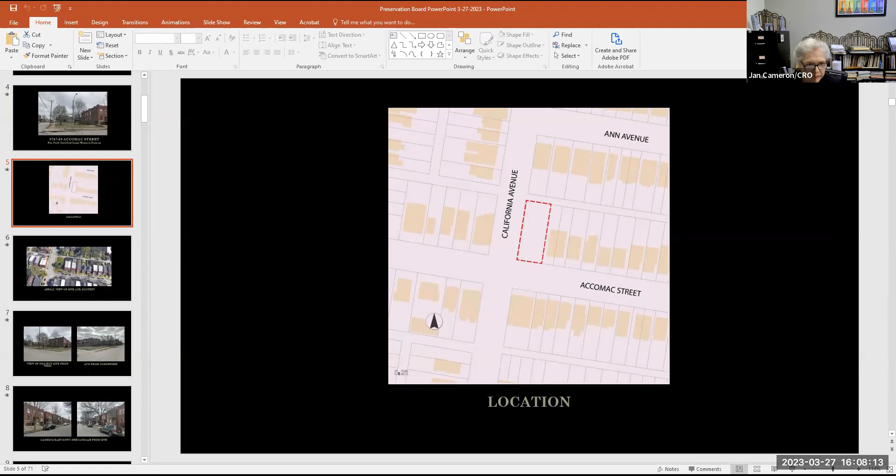It's at the corner of Accomac and California Avenue. There are a couple of things missing from the submission, but we are proposing to recommend anyway that the board grant preliminary approval with the usual conditions. This is, as I said, a two-story house. Could we go to the next one, Meg?

And you see the context of the block, and that's the corner there. I could have done a better job outlining it, I guess, but the corner property towards the center of the screen is the site. You can see that the architecture is very consistent in scale and materials, and the proposed building will comply with that. Next.

Another shot of the lot. So it has a substantial exposure from three directions. Next.

And this is the context directly to the east of the site. As you can see, again, it's extremely consistent in rhythm, materials, and scale. Next. This is looking to the south of the site. It's actually at the left-hand side at the intersection. And next.

And now we're standing on Accomac, looking towards the site to the west. Next.

Okay, so now this is the site plan. We do not have any plans for the proposed garage or carport at the alley. But you can see that it conforms to the setback of the block as it should. Next.

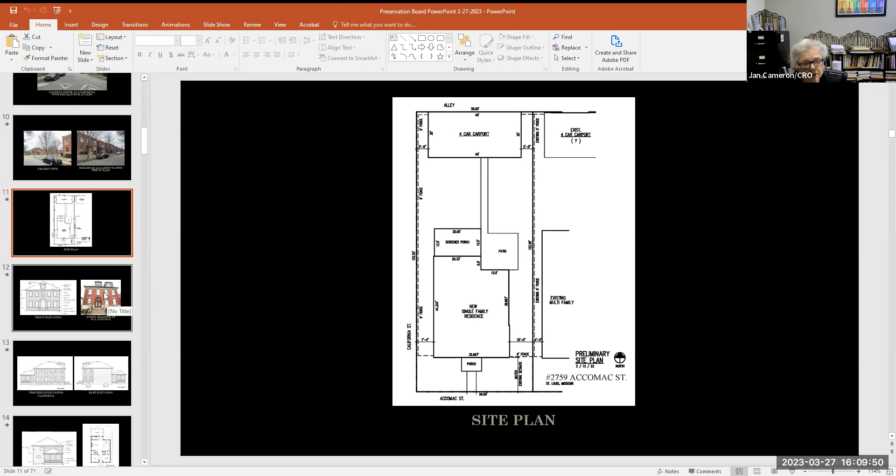The submitted model example is at 2812 Accomac. It's taken its inspiration from it. It is not an exact copy, which the standards do not require. But the materials and most of the detailing is correct. It's a little bit simplified. Next.

On the left is the west elevation, and this is the California street facade. You can see that substantial amount of fenestration according to the standards. The opposite side, the east elevation, will be up against the neighboring property. So they have returned the brick the same distance as the distance between the buildings as the standards require.

A couple of concerns, or well, things that need attention on the California elevation: the stone does not appear to run down to grade at the foundation, and we haven't any specific details yet for the proposed porch at the rear. Next.

And this is the rear elevation where the porch is a little bit more prominent, and this will be visible from the street. Next.

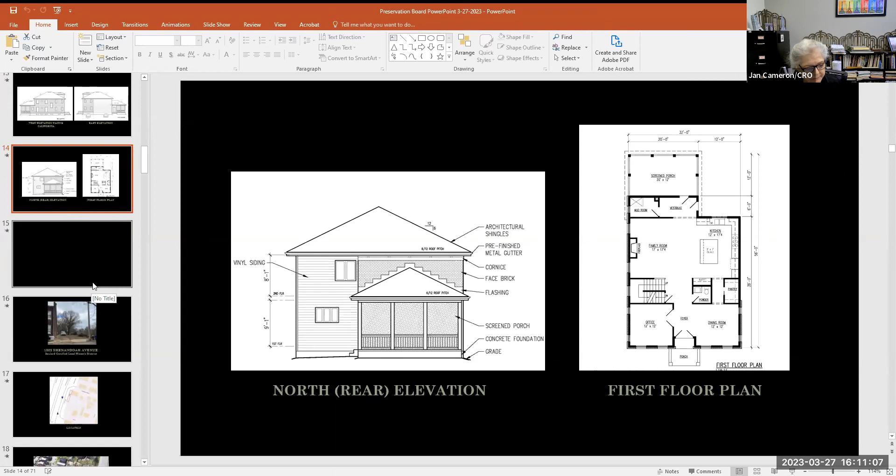Okay, so staff is recommending the preliminary review be granted, subject to the Cultural Resources Office reviewing and approving final plans, exterior details, material selections, and the plans for the proposed carport or garage.

Questions? Commissioners, do you have questions for Jan? I do. Jan, are you going to keep an eye on this stone base?

It's so often these stone bases don't really look anything like the stone bases that the model examples are. Can you go to the next elevation, where it sort of floats above a lot of concrete in the windows? That would not be something we could approve.

But again, this is a very preliminary submission, so we do not have material samples now. They may be having those at the meeting tonight. I'm not certain. But also just the design of this thing, where the stone floats above the windows, it's just sort of awkward.

Is that the kind of thing you would catch at staff level? Absolutely. Okay, thank you. Further questions of Jan?

Okay, let's have the applicants, and we'll have questions for them. Ms. Ball? There you go. Okay, you're here.

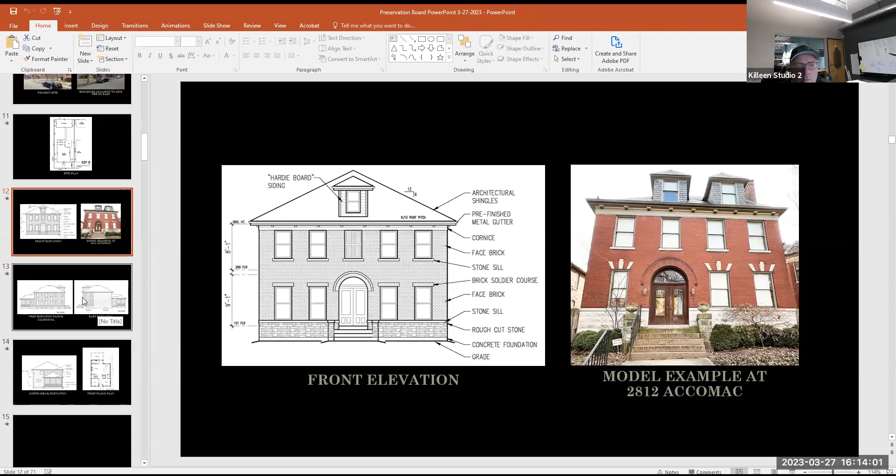Thank you. Further questions from commissioners of the applicant? Just so you guys do know, our architect is on the call, John Elbers, and then our contractor is on the call as well, Tim Dolan. So if you have specifics that I might not be able to answer.

Okay, commissioners, questions for the applicant's architect, or for the applicant's contractor? Anybody? Mr. Albers, you're following me on that, I assume, right? Yes, I am. Thank you, nice work. Okay, Michael, did you have a question?

Just a general question to the team: are you comfortable to work out details and abide by the staff decisions on this plan? Yes, absolutely. Wonderful, thank you. Jan, has anybody signed up to testify?

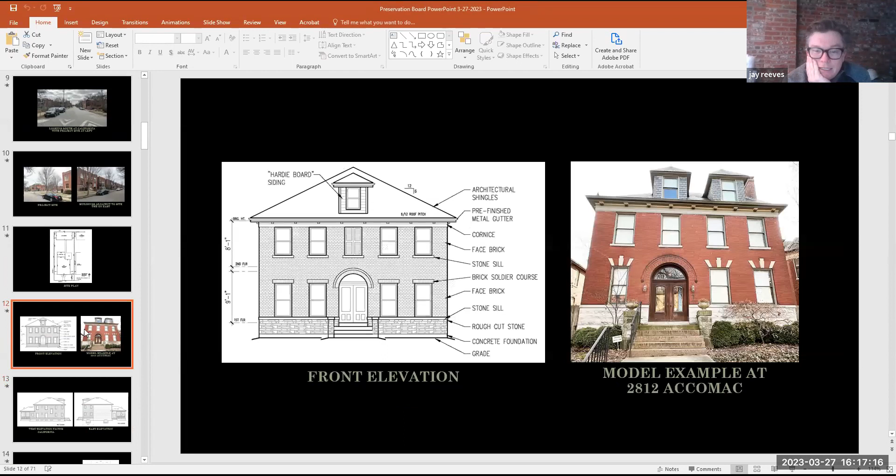Number two, the mass and proportion of the Accomac elevation, the California elevation, and the north elevations are not comparable to the mass of the adjacent buildings or the common overall building mass within the block of the model example. On that topic we have a few comments.

One is there appear to be no two-story houses on that block as wide as this, 33 feet wide or wider, with a hipped roof and only one dormer on a public facade. The model example is of a similar scale as the proposed, but has two front-facing dormers.

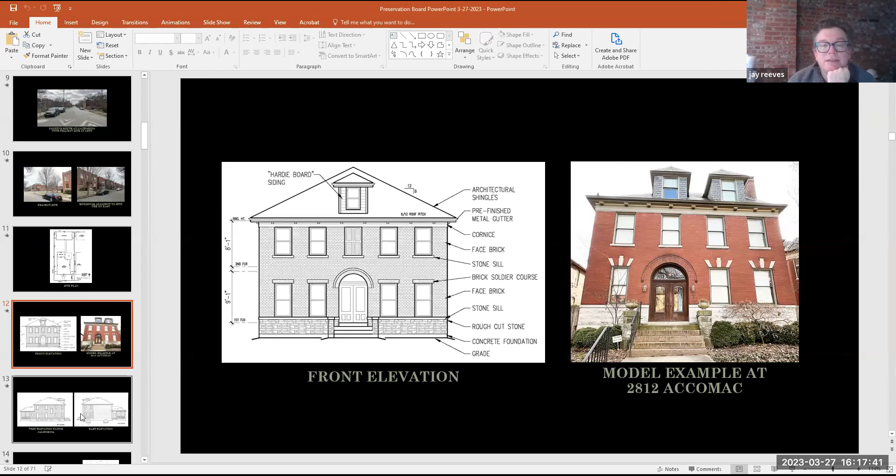The roof lines are all less intricate, particularly as we move to the California side. It's really just a big blank hipped roof. Dormers are more sparse or non-existent.

The first floor projection beyond the plane of the second floor walls on the California elevation, where the north facade stretches under that first floor roof addition, is not seen elsewhere. The first floor roof addition on a public facade is not something we're used to seeing either in the neighboring buildings or in the model example.

And then the screen porch, which is dominant to California, is on the public facade, and that's not seen in the model example or comparable to any adjacent buildings within the block.

Finally on that subject, the model example has dormers and detailed bays projecting beyond the typical wall plane on the side facades, which in the model example are really just facing another building, but that does provide more richness in massing and proportions than we see on this proposal.

But on this proposal, that's facing California, so that California and north elevations are pretty dominant, but there's really no detail there.

Item three was the ratio of solid to void. There was a report mentioned, but it's not been met on the California facade per the district standards. CRO states it partly complies with a 23% ratio, but that's less than the 25% minimum. But our position is actually that it's 14%, because that 23% includes the ratio of screen porch openings as part of an opening.

But as we're seeing that as a clad wall of screen, we see that as a solid, and it doesn't seem like that should count towards window openings. So by our math it's 14%, which is well below the 23% or 25% minimum. Similarly, the ratio of solid to void is not met on the north, which is a semi-public facade.

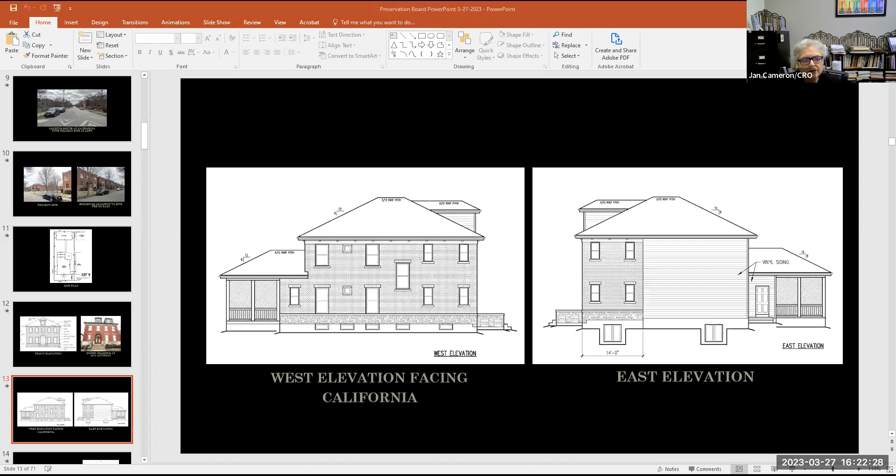Well, I thought that the majority of those issues were minor enough to be handled at the staff level, but if that's a big concern of the neighborhood, then we could certainly work with them and the applicants to come to some kind of appropriate ending, I guess.

Cool, thank you. Let's see. Commissioner Killeen, have you got a motion? Yes, sir. I move that we defer action on this for a minimum of one meeting.

Is there a second? Second. Any discussion? Commissioners, there's a motion on the floor to defer consideration of this for a minimum of one meeting. I'm going to call a roll and see what you think about that. Commissioner Robinson, do you vote yes or no?

Can't hear you, Tony. Thumbs up or thumbs down? Thumbs up is yes, okay. Let's see, where did my lawyer go? Nancy, is a thumbs up okay? He's having audio difficulties. No, I can't hear you either. Why don't we try to come back to him? But yes, I think since you're just deferring, that's probably fine.

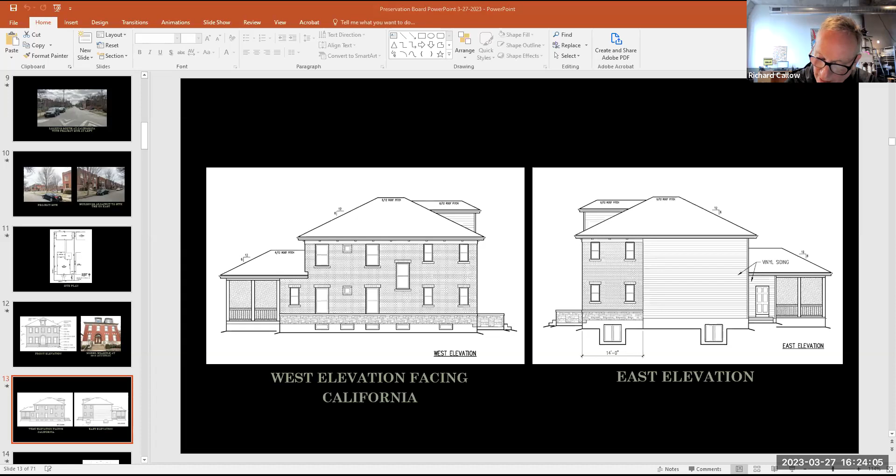Commissioner Hamilton, yes or no? Yes. Commissioner Killeen, yes or no on your motion? Yes. Commissioner Richardson, yes or no? Yes. Commissioner Allen, yes or no? Yes. Commissioner Hammaker, yes or no? Yes. The chair abstains on this vote. Counts 6 yeses, 1 abstention, no nos. The item is deferred for at least one meeting.

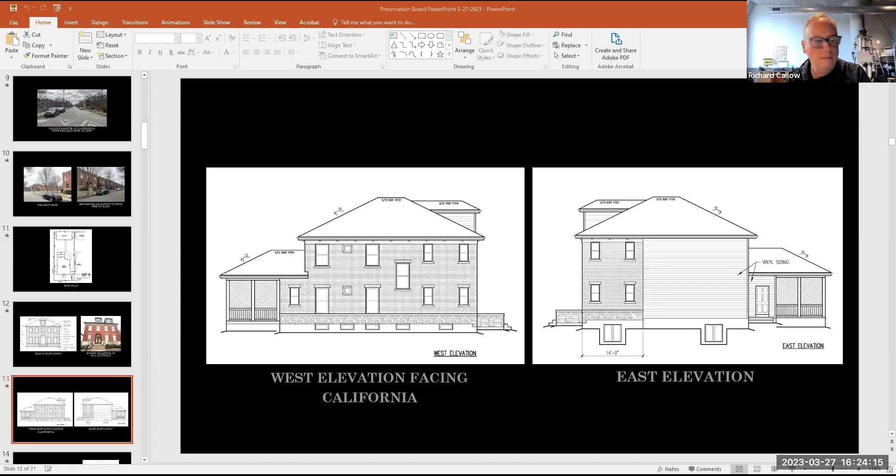Okay, let's do agenda item B. Sorry, can I ask just one question before we move on? Yes ma'am. So what are our next steps? I just want to make sure that we have everything that we need, so we can get everything fixed and not get deferred again. I think you can expect a phone call either today or tomorrow from the Cultural Resources staff. I would personally not be inclined to defer this another time, so I hope this can get worked out between the two meetings. Can I say something? No.

Let's do agenda item B, 1332 Shenandoah. Okay, this is another proposed single-family new construction, this time in the Soulard Historic District. It's a very interesting little lot at the corner of, well, actually really at the end of Shenandoah Avenue. Could we go to the next one, please?

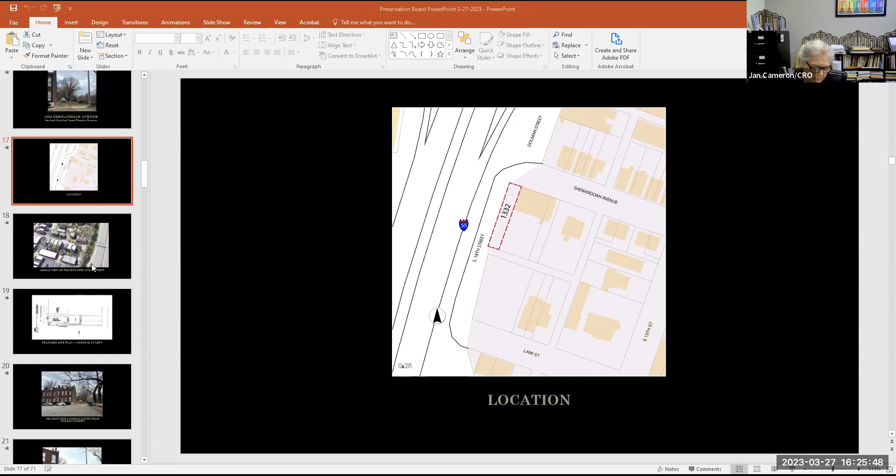It's right up against the highway. And there used to be 18th Street there, but it's no longer there. It's all the right of way of the highway.

There will be very little possibility of anyone seeing the western facade, which is up against the right of way of the highway. So the brick ends at that corner, and we feel that that's a reasonable compromise. You can see that it's going to, well, let's get to the next one, please.

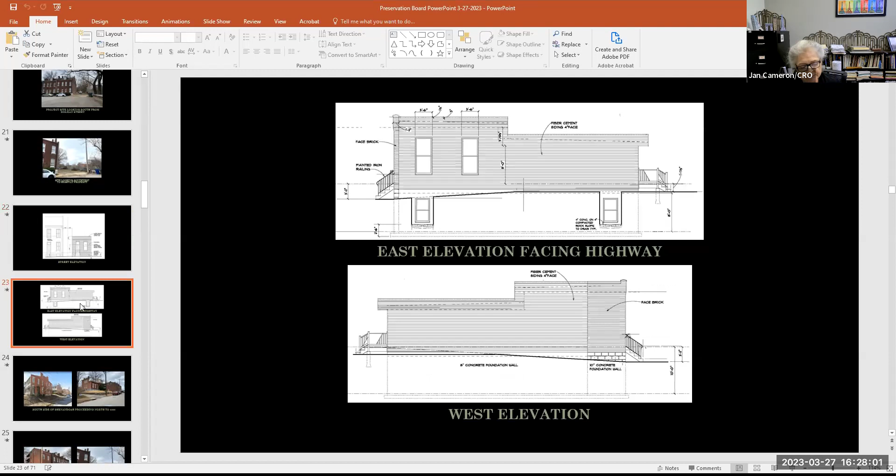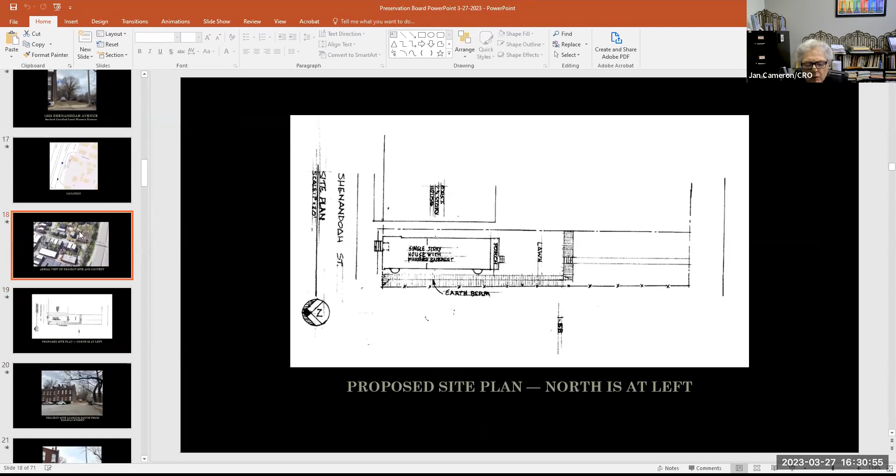Well, it doesn't, but I think that the extraordinary character of this site and its location is not going to have much of an impact on the block by having a 1-story here. I mean, there's a whole mix of building types and setbacks on that side of the block. And yeah, and I saw that, honestly. But it's almost like being at a dead end to go up the street. So we thought that a little bit more flexibility was appropriate.

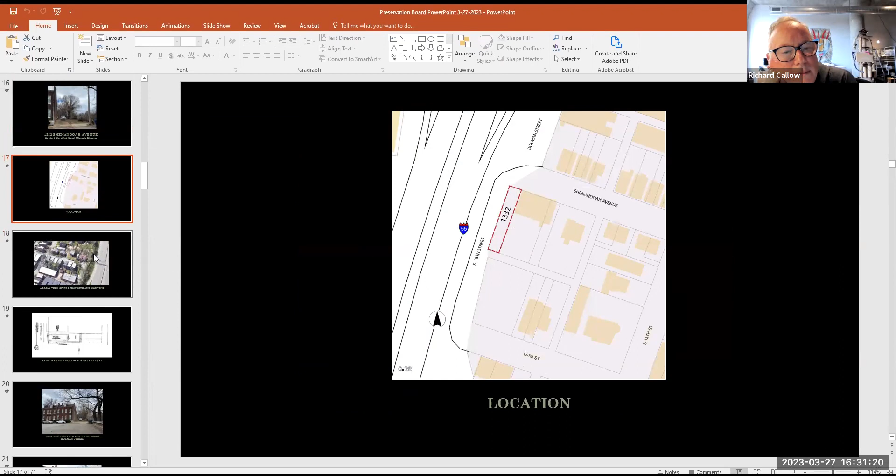Jan, please put your cursor where it's going to go. I don't have a cursor. Who has it? I've got the cursor. Okay, right here.

Okay. And it will align with the buildings adjacent to it. So, what's the width of it?

I'm not exactly sure. Let's see, sorry, because I cut all the dimensions off. It's about 16 feet. Okay, thank you.

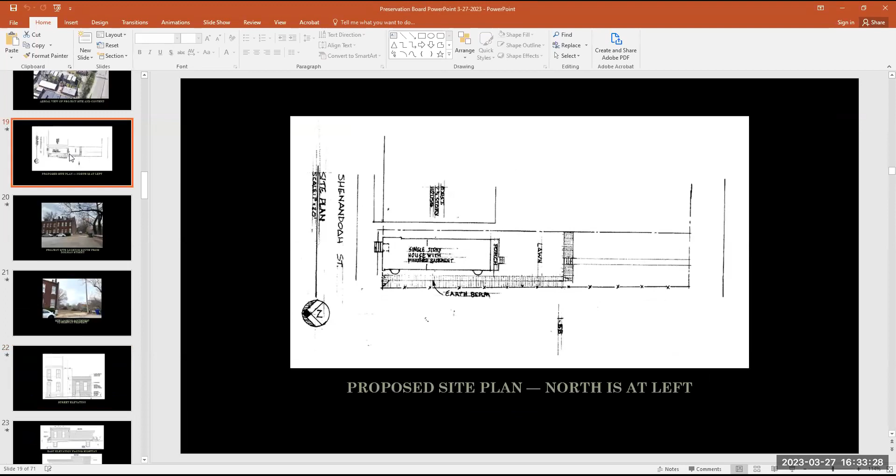The lot is so small, it's only 26 foot wide. The building is 16 foot wide. That'll leave, we would comply with the 4 foot setback on the east side. It only leaves about, I believe, 6 feet on the west side. Couldn't do anything much wider, much larger, and still be in compliance with the setbacks. So, pretty much what we wanted, I guess, is my answer.

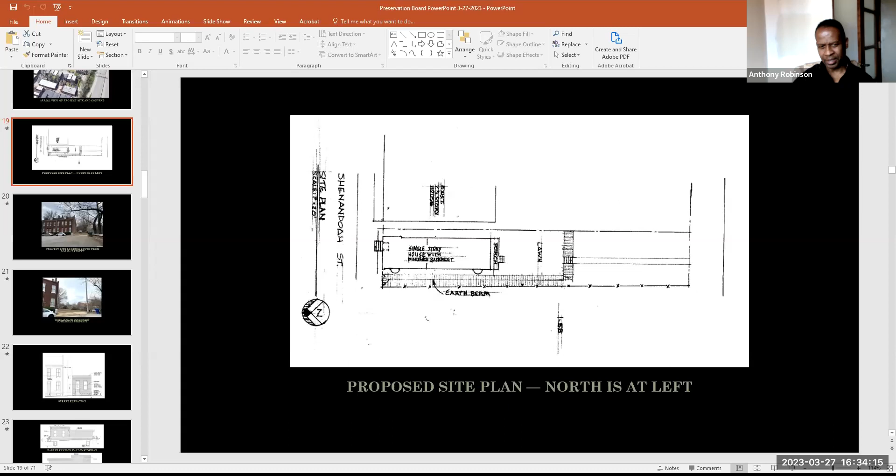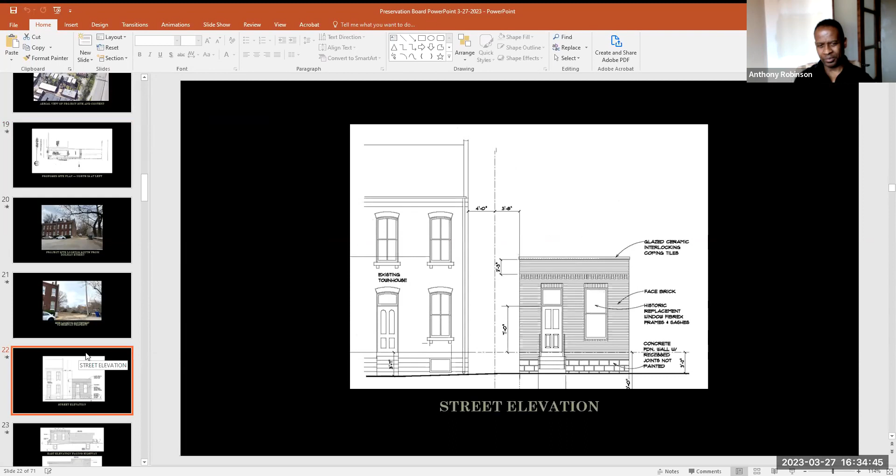Yeah, I'm not sure my question was exactly answered. I understand you have living space in the basement, but one of the historic requirements involves cornice eave lines, and this substantially doesn't comply. My other concern is you've got a 26 foot wide lot and a 16 foot wide building, which means in my mind substantial space to work with. Now when you factor in the setbacks on both sides would be 4 foot. It's my understanding the setback would actually be 3 feet, and that would allow you a 20 foot wide building.

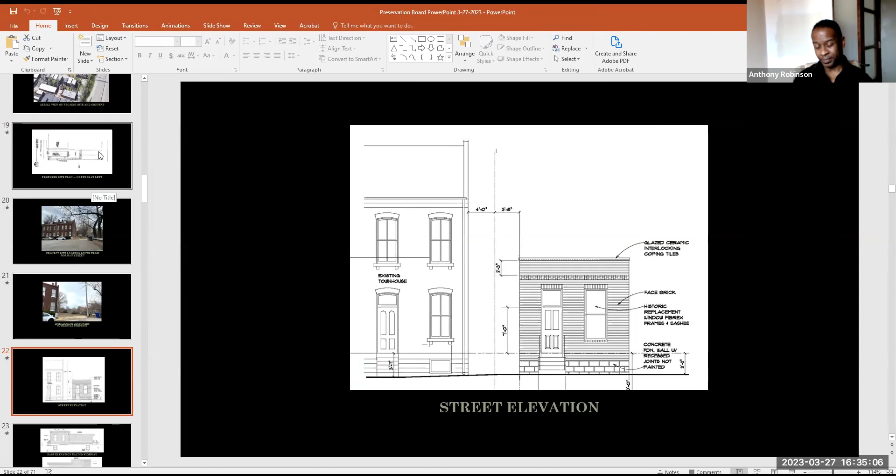In my preliminary inquiries with zoning, I was told 4 feet. That's what I was going by. It is 4 feet under normal circumstances, but in a narrow lot, it's 3 feet. That is the main building. Yeah, and this would be, in fact, the main building. Yeah, okay.

Further questions? Commissioner Allen? Just a question about the front door, since this came up with a letter sent to us in our packet too. It looks like the design has changed to be a 4-panel rather than a single panel with a single light. But if we could clarify, are those upper panels glazed or solid? What's going on here?

Is your question to me or to Cultural Resources? To you - our staff can answer it, but since you're the applicant and this is what you're proposing, maybe you can answer. I wish our architect was on with us, but I don't believe he was talking about them being glazed at all. My concern was I wanted a door to have a transom above it so it fit in, and that's also what drove the entire need for 10-foot ceilings in the front part of the building. But the transom itself would be glazed to let light in, of course.

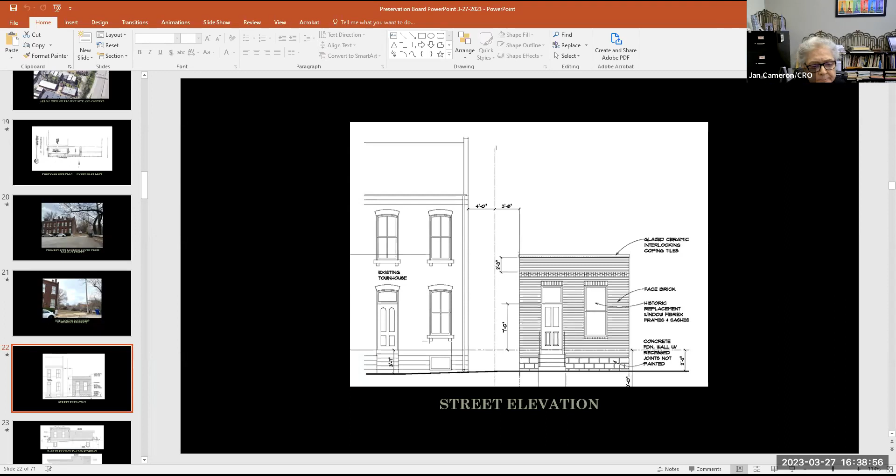Okay, Commissioner Robinson, would you like to make this motion? Sure, I move that the preservation board hold on just a second.

You've gotten the easy part. Now we need a verb. I move that the preservation board deny preliminary approval, as the design does not currently meet the historic district standards.

Second. Discussion. Commissioner Robinson, anything to add to your comments from the questions?

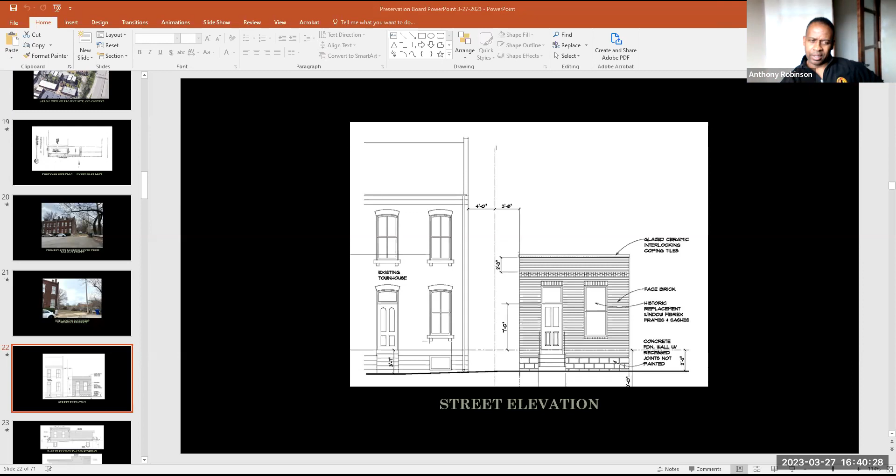Well, while I see that designs on the block are different, setbacks are as well, but looking even on that side of the block, every one of the structures is 2-story, 2.5-story. So I think this sets a really bad precedent. Everything on the other side of the block, while the building line is consistent there, this side it's not, and I get that, but the height, yeah, that's a problem.

And then I also don't think that given the width of the lot, they're doing a disservice to what could be done on the lot. And I understand about getting old, and that makes sense, but the reality is you can design a house where the master is on the first floor to address that and still create a second floor, which I think should have been done.

Further comments? Yeah, I have some comments on this one. I think the staff report said that there is like a 1.5 story on that block face. So I think it ranges from 1.5 stories to 2.5 stories.

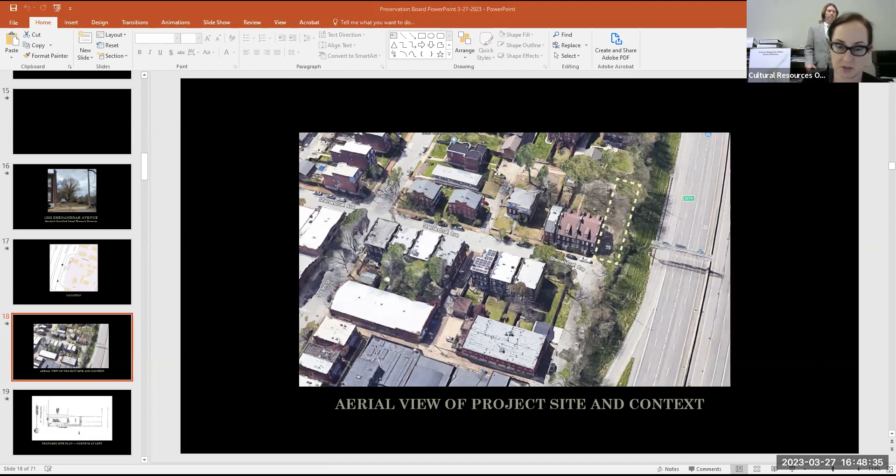Okay, how do you want to handle C and D, Meg? Since they are basically identical projects on adjacent vacant lots, Mr. Bettis will present them as one project, and I will turn the computer over to him.

Hello everyone, how are you this evening? Hey Bob. Are you looking more and more like Keanu Reeves every meeting? Well, we're going for a look, and I cannot pull it off at all, but I'm gonna keep trying. I think it's very successful. Tiffany, what do you think? Don't make her say anything. I'm sitting over here laughing to myself. Listen, I'm pushing 50, if I can still do this, I'm doing it. You are not pushing 50, sir. I sadly am, unfortunately. You're aging well. Whatever makes you feel younger.

You look good. Can we see the PowerPoint? Okay, let me get caught up real quick here on the PowerPoint.

Some background: I think a few of you were not here last month. These two items were deferred so the applicant had time to meet with the neighborhood to discuss the projects. I'll be brief since this was discussed prior, and I did enter in all my items last month. Richard, am I okay since this was deferred? Yes, you are, this is a deferment. Thank you, sir. So the proposal is to construct two new houses at the empty lots you see before you.

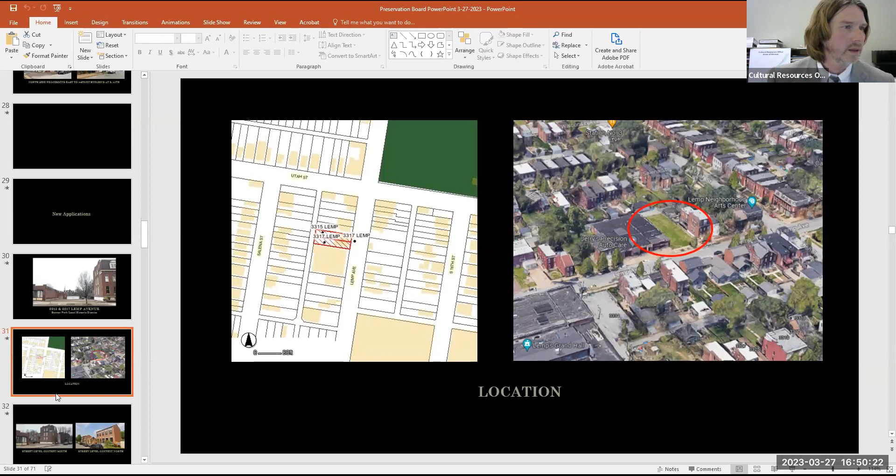This is the proposed location. We're in Benton Park, just south of Utah. Here's some street level context. Across the street you have several new constructions over the past decade or so, and the left-hand side is the context on the block itself. This is looking south on the same street. On the right we have some 1-story commercial along with 2-story. The block itself is a mix of 2.5-story, 2-story, and 1-story buildings. And this is the streetscape for the proposal.

This is the model example for the property, at 3313 Illinois. So this is where I want to stop and give some more background. You may have read this in your staff reports, but I want to reiterate: the board saw this exact same design in 2019 and approved it as submitted.

Staff felt that since this came in the exact same way, at that time we also did recommend approval. We felt that given the site conditions are pretty much identical to the Illinois side, for the most part, we would still recommend approval. We felt it generally met the appearance of the model example. At the last meeting, the neighborhood did bring up a good point which I missed, and I wanted to bring that up really quick.

On the south elevation of the 3317 building, you will see some of the second floor. So we're going to have them run the brick much further back than originally proposed, and that revised elevation is in your packet.

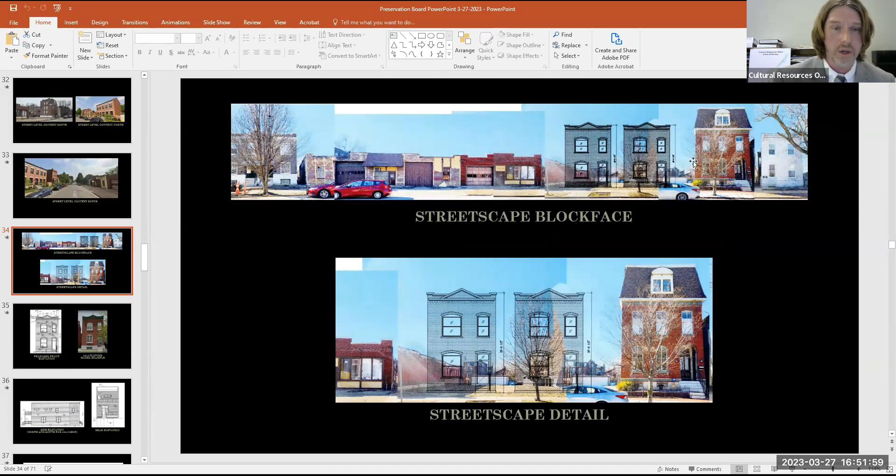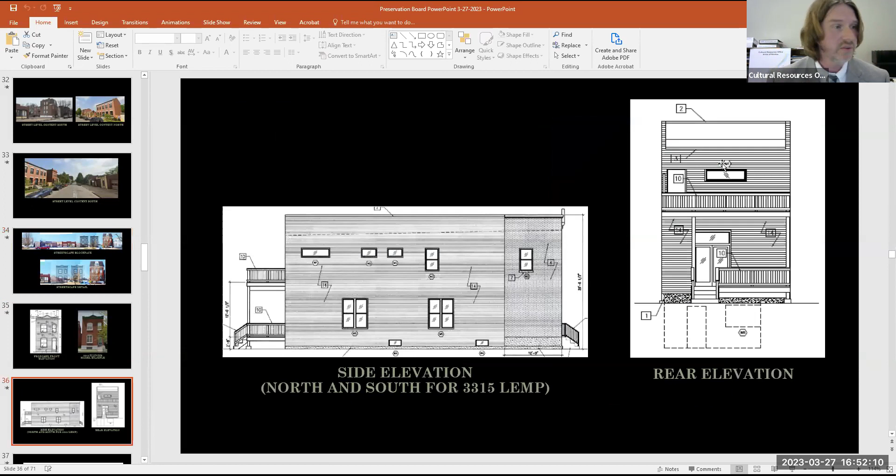This is the rear elevation for both properties - the south elevation and north elevation for 3315, and also the north elevation for the 3317 building. This is now the revised elevation for Lemp. I directed the applicant and architect to reference the brick massing of the property here on the right, having it run back, making a plane break, so you have a logical break where brick would be historically. Then on that rear portion, we can trim it out to make it look more like a frame addition. We felt that was a little more appropriate, and it gives a better line of sight over that 1-story building. That was a change from last month, and the applicant was totally fine with doing that.

So given that, staff did recommend approval, subject to the usual language where we will review final details, drawings, materials, and colors. You did get a packet from us with letters from the Benton Park Neighborhood Group, and Mr. Mulligan is here as well to speak. Any questions for me?

Bob, I see the model example has a window at the basement, nothing in the drawing for that. Right, so when this was approved initially in 2019, it did not have a window there. That was also brought up by the neighborhood group. Since the front facade really has no difference in terms of the sites from the previous one to this proposal, we felt we should recommend it as submitted. The neighborhood group would like to see a window in there. If there were to be a taller foundation for these, perhaps we could see that being a different proposal, but this is what we saw last time exactly. So we felt we had the need to recommend approval as submitted like this.

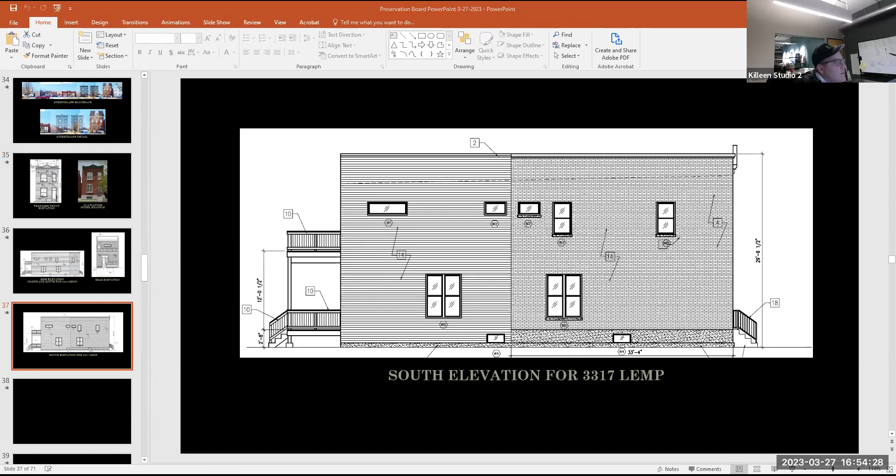Who wants to ask him about the basement window? Oh sure, I'll ask Mr. Askins, would you be up for putting a window in the basement in your front facade? We prefer not to, based on the previous drawings that were approved. The previous house we did not require it, we would prefer not to. We made the adjustment and the financial costs without hesitation with the addition of brick that Bob asked us to do, so we felt like we were definitely trying to work with him on that, and we've done that. We hope that a basement window is not something that, considering it's been approved before, would hold us up. Thank you, further questions of the applicant?

Okay Bob, who did you say was here to speak? We have Tim Mulligan from the Benton Park Neighborhood Association. Hello Tim, speak. Hi, thanks for accommodating time to review this for the neighborhood.

Unfortunately we weren't able to catch up with Mr. Atkins during the month, but we did a review, and the reference building that was built at 3327 Illinois has some, I would refer to them as just unpleasant discrepancies from the model, and they're called out in my letter.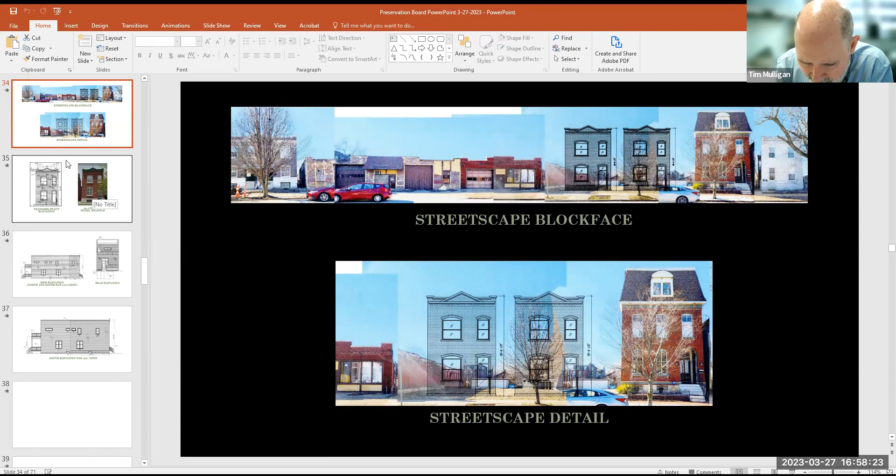And then there's other examples, like the brick windowsill, which seems to be proportionally very mismatched. Generally those are 2 bricks high. The one on 3327 is a little more than 1 brick high, so there's some proportion challenges there. And the polychrome brick is not really a historic detail found throughout the neighborhood, so we request just utilizing the same brick for the detailing.

I think those are the highlights.

Thank you. Mr. Callaway, if I may address— Wait, who's speaking? Orlando Askins. I have not called on you yet, sir.

I have a question. Go ahead. I guess I'm confused procedurally. If this was approved a few years ago with these designs, what occurred to prevent the actual building from complying with those designs? What went wrong at that point?

Bob, do you remember? I'm unaware, I was not here at that time. Are you asking why the building was constructed to not match what was approved at the board? I'm sorry, is that what you're saying? Yeah, that's what I'm wondering. I'm wondering, okay, we could approve the drawings again, but then what would prevent this same thing from occurring where the end result was not what the drawing said?

Sure. It's not for us to speak for other departments and other people in the field who have to do these inspections. Unfortunately, we'll have to ask for some more diligence at the site level. That's all we can really do. Staff does not go out there and watch every step of the build, so we do rely on other departments to make sure that they've followed those plans. That's all I can really say on that, and I don't want to speak for other departments.

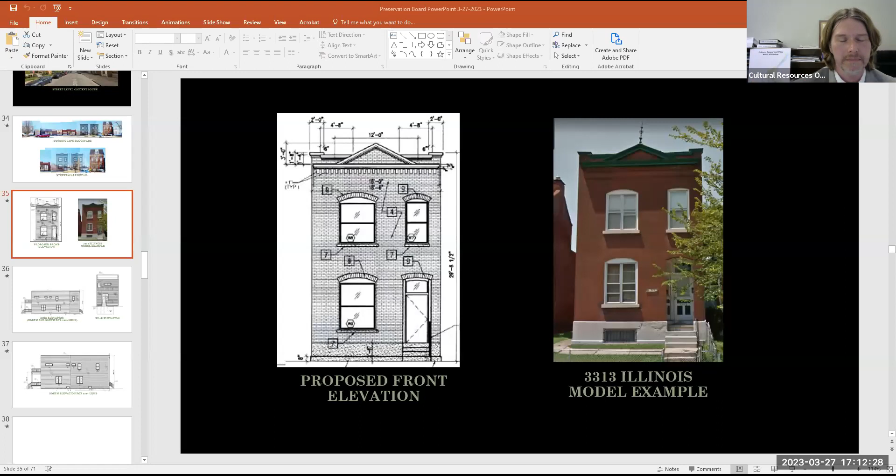So I think the window, from a realtor standpoint, he's making all these adjustments, and something like that is a major addition to a budget. And we have a model example that it says it complies with. So I don't know what the circumstances were behind that. I know most of us were on the board in 2019 in-person meetings. So again, this goes back to making decisions here and there. If we have something that it complies to, I don't understand why we would make this additional requirement. You know, and if the model was not there, I would understand why we would require it, but we have a model. So I say we deal with what's in front of us.

Okay, just reminding everyone that the motion on the floor is to approve this preliminary design. And Mr. Calloway, I think it's only fair— I'm sorry, who is speaking? This is Orlando Askins. You allowed Mr. Tim Mulligan to speak in response to some things. I think it's only fair that I get an opportunity.

He was asked a direct question by a commissioner, but I didn't get an opportunity to respond to his statement, sir. And I'm not offering you one either. Well, okay. I want to go on the record and state that I object to that, because he made some statements that we did not get an opportunity to respond to. We tried to reach out to him. Okay. Well, the motion on the floor is to approve the design.

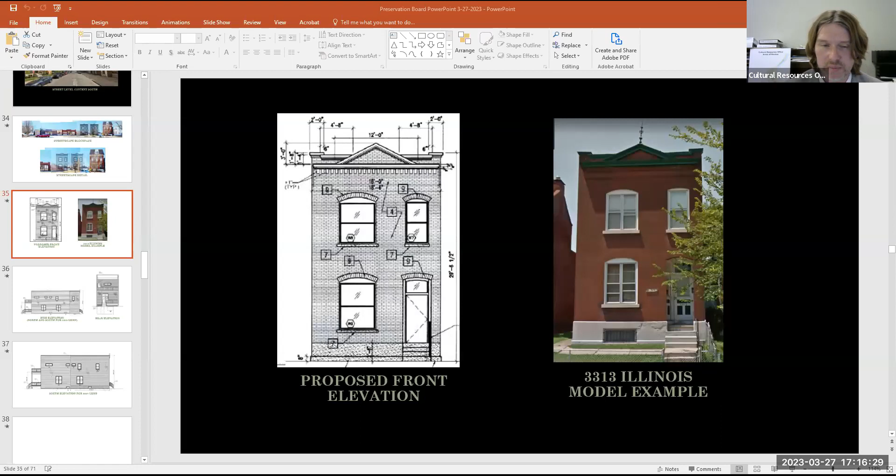Well, that is not the motion that's on the floor. Well, what is the motion, sir? Maybe I misunderstood it. Bob, repeat the motion. It was the motion to approve and work with staff on final details and drawings. There was a question about other items, but that's not part of the actual motion. So it's the usual: work with staff on details, colors, materials, items like that.

Did you hear that, Mr. Askins? I did, and I said yes to that. In fact, the brick that Mr. Mulligan is objecting to was approved by Cultural Resources based on their request, not our choice. This is the choice they recommended, and we capitulated. Okay, I think we're on the same page.

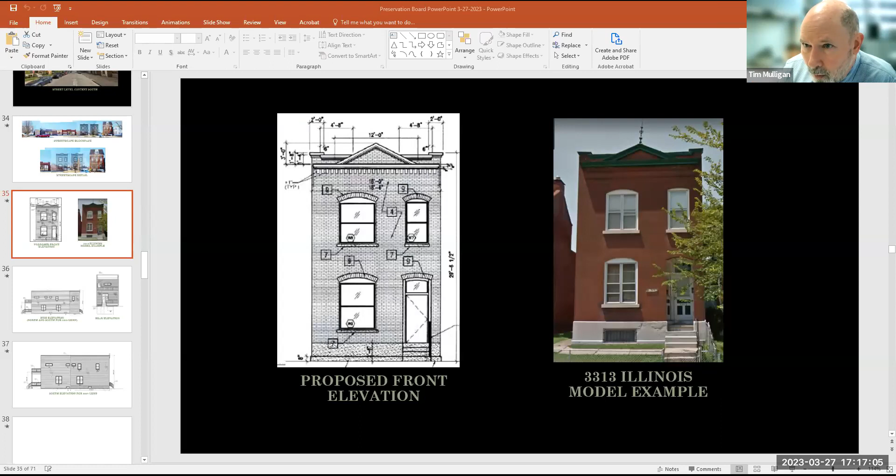Thank you, Mulligan. Is there anything you'd like to add? Well, just that we really find the way the previous model example turned out to be a disgrace, but other than that, no.

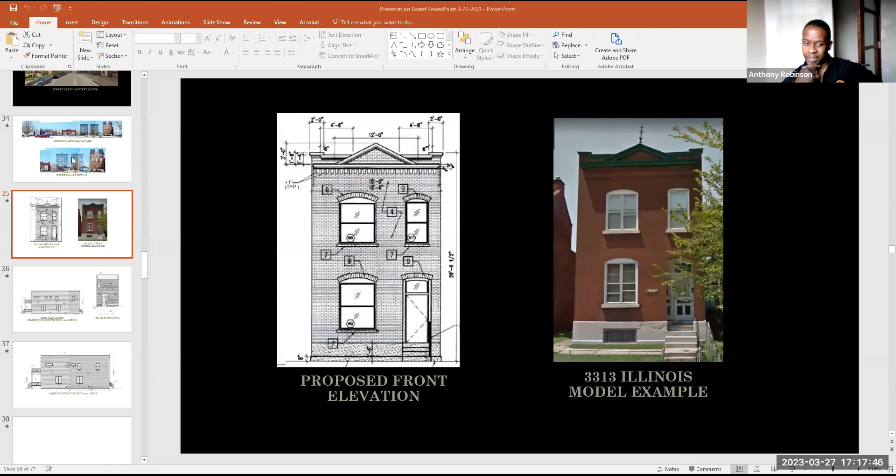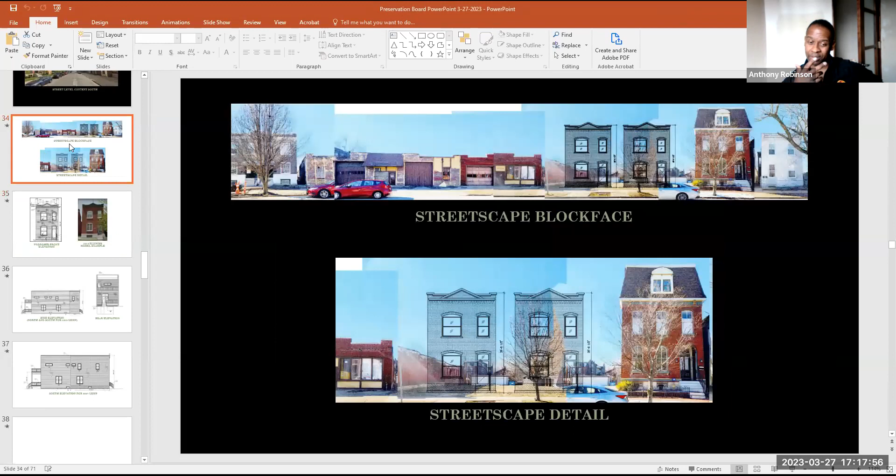So it sounds to me like right now what we're dealing with is the window sill thickness and then the house as built, the details not quite lining up with what we approved. Again, I think that the neighborhood association, if those are true concerns, should be more diligent as these buildings are going up. As Commissioner Bridgerton pointed out, we're considering what's before us, not what happened before.

Any further discussion, commissioners? I'll add that on this particular block, even in the worst case scenario, these would still probably be the nicest infill housing on that side of the street. If you're talking about disgraces, there are some really bad examples on the other face of that block.

Further discussion from commissioners? Okay, I think we've heard from commissioners. We've allowed the applicant to ventilate. We've heard from the neighborhood association. There's a motion on the floor. It is to approve with conditions this design.

Commissioner Robinson, on this motion, do you vote yes or no? Yes. Commissioner Hamilton, yes or no? Yes. Commissioner Killeen, yes or no? No. Commissioner Richardson, yes or no? Yes. Commissioner Allen, yes or no? Yes. Commissioner Hamaker, yes or no? Yes. Chair abstains on this vote. That's 5 yeses, 1 no, 1 abstention, and the motion carries.

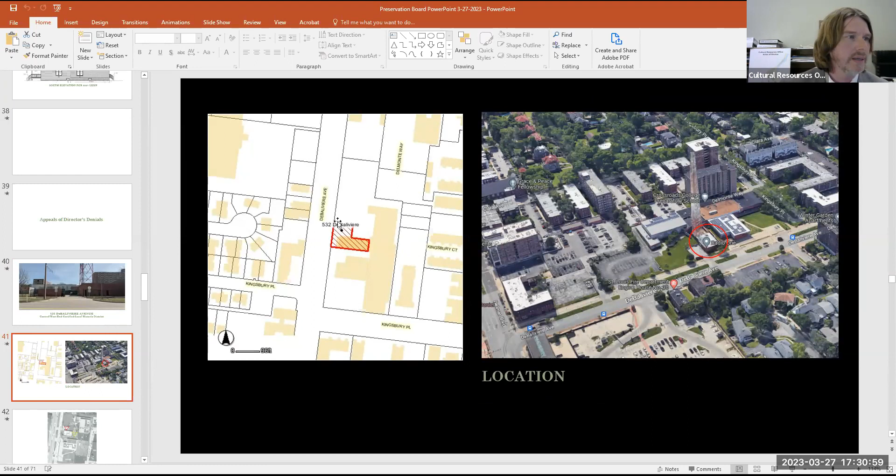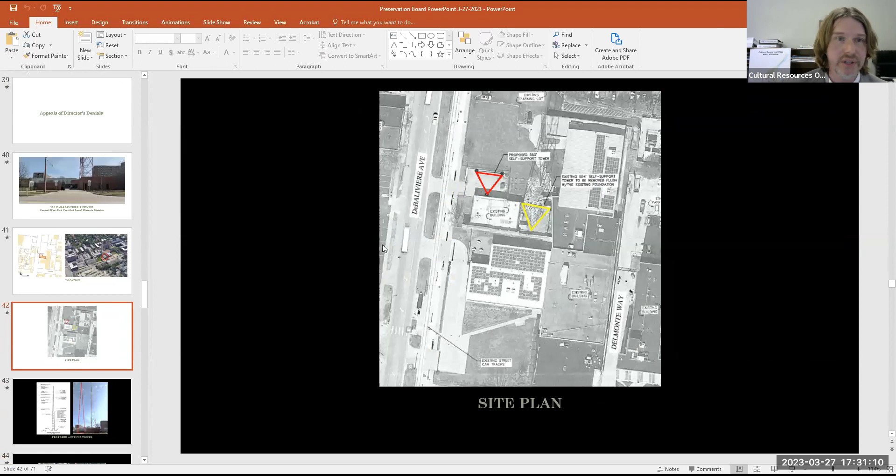Let's go through the site quickly. It's on the very western edge of the Central West End Local Historic District on DeBaliviere. The site is kind of surrounded by a high school on three sides, but it does front on DeBaliviere. You can see the site here. This shows in yellow the existing antenna, and in red the proposed location of the new antenna. I've done some really bad red triangles to give you an approximation of what you would see on site. The tower will be black, but I thought red would be more clear.

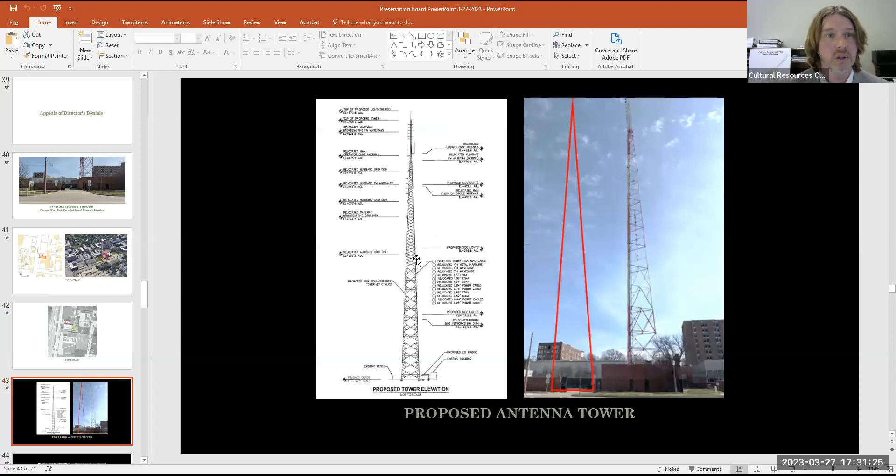So this is kind of a bird's eye view, looking north on DeBaliviere, looking south. Bob, if it really looked like your drawing, I would vote for it in a minute. It's really kind of abstract, let's be honest—you can see through it easily. It's one-dimensional. It's crazy, okay.

So this is the street level view. The tower itself will be in this parking lot. At some point we can discuss screening for the proposed tower. The applicant has reached out to Central West End. They are not going to formally comment on the item today, but there has been some positive discussions with Jim Dwyer's group about street level screening to augment the view of the new tower, including tall evergreen hedges in front of the brick wall. We can work out those details later, but the applicant is open to increased screening at street level.

So essentially it comes down to this: the Central West End Code says you can't build new antennas. Even though it probably wasn't meant to address this specific kind of antenna, there's no definition of the word antenna. So staff is looking at this as a brand new antenna, not just one on a house for a TV set. It's staff's opinion that we cannot approve this at staff level because it does not meet the code by the strict letter of the rules, and it will have more of an impact. Moving the tower up to the street will have a greater impact on the DeBaliviere view looking north and south. So staff does recommend that the board uphold the director's denial of the permit application to construct a new 550-foot antenna tower, as it does not comply with the Central West End Historic District standards.

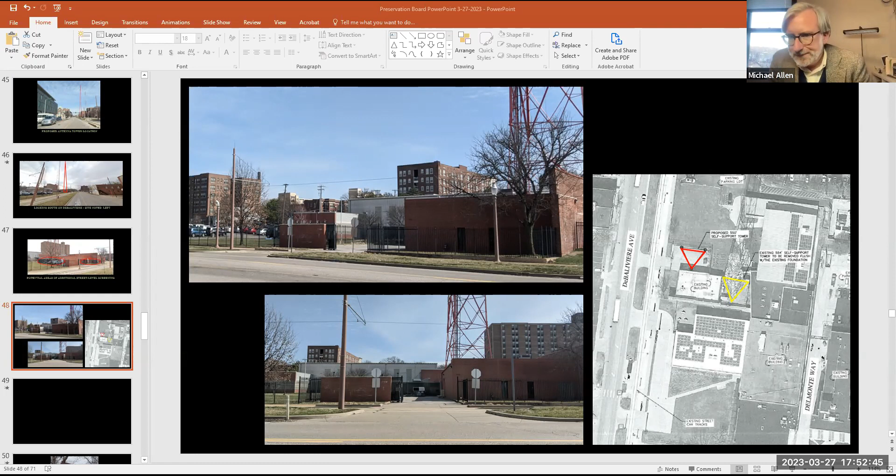Okay, thank you, commissioners, for thoughtful testimony. There is a motion on the floor. It is to uphold the appeal. Overturn the appeal? No, well, she said approve the permit. So we need to maybe restate the motion to state overturn the director's denial. Overturn the director's denial, approve the appeal, right? Yeah, okay. Everybody agrees, right?

Commissioner Robinson, do you vote yes or no? Yes to the overturn of the director's denial and upholding the appeal. A very careful yes. Let's see, Commissioner Killeen, yes or no? Yes. Commissioner Richardson, are you back? Commissioner Allen, yes or no? Yes. Commissioner Hamaker, yes or no? Yes. Chair abstains on this motion, counts four yeses, no nos. The appeal is upheld and the denial is overturned.

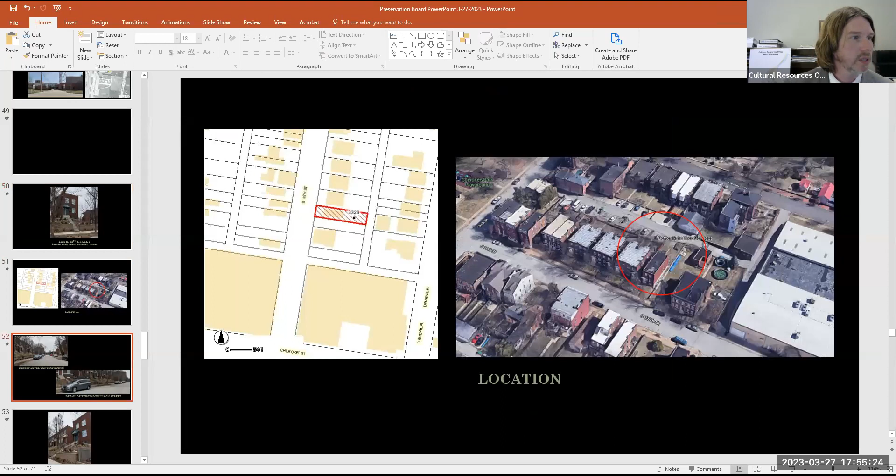Here's the site in question, South 18th Street, just south of Cherokee Park, right by Cherokee Street. Context, and just as a reminder, the east side of this block has several houses that already have concrete block walls. All of those walls were installed prior to the Benton Park Local Historic District being established, so they predate the code. They're not compliant, but they're grandfathered in.

This is the wall in question again. I'd like to note there's a brick wall that you see kind of behind this chain link fence. A previous owner came to our office and had that approved. It met the ordinance, it's a brick wall, it meets the code for retaining walls. So that was an approved retaining wall that met the codes, done by a previous owner. Everything else you see was not.

There's a close-up shot of the approved brick wall. So this is a before and after condition. Obviously there's a steep slope here. It could warrant a retaining wall if need be, but again, it's not a compliant wall that was constructed.

You were sent a letter from Benton Park regarding their feelings on the item. Mr. Mulligan is here to speak on it again. Just to remind you, staff did recommend that the board uphold the director's denial, as the installed wall does not meet the Benton Park Historic District Code.

Commissioners, have any questions occurred to you for Bob in the intervening time? No. Okay then, let's have the appellant back.

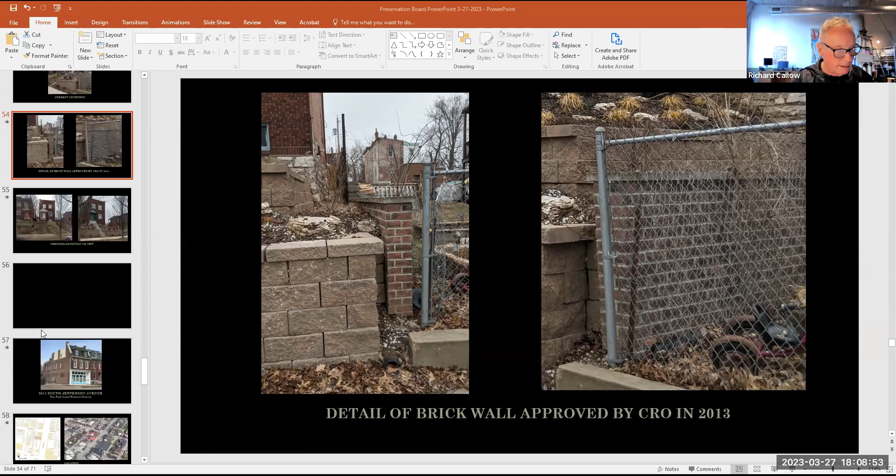Okay, commissioners, agenda item G.

Okay, my last one for this evening. Bob Bettis with staff. I resided in 63139. I need to enter in the Fox Parks. Bob, I should tell you, I just got a text from the director. You're also delivering the director's report. Yeah, that's good, I figured as much. It just feels appropriate tonight. I don't know why, just keep the ball rolling. You threw me off, Richard. Okay, I need to enter in the Fox Park Ordinance 66098, our enabling ordinance 64689, as amended by 69423. My PowerPoint staff report. Oh, you see what you did to me. Yeah, everything else I can do. I will tell the truth.

Paint on brick. This is an appeal of a director's denial to install a mural on the south facade of the building you see before you. This is reminiscent of the Angry Bird mural we call affectionately in our office, the one you saw in Central West End. We want to say at the outset, this has nothing to do with content. It's strictly dealing with paint on unpainted masonry.

Staff receives many complaints citywide regarding people painting their brick. So we have to be diligent in all aspects of the code when it comes to painting brick, be it murals or someone wanting to paint their brick house bright gray, but we have to be consistent with it. The Fox Park Code specifically says you cannot paint unpainted masonry. The applicants, I'll credit them, have done some research to find paint that is permeable, that will allow, they say, the passage of moisture in without damaging the brick itself. However, the code does not specify that. It just says you can't paint unpainted masonry.

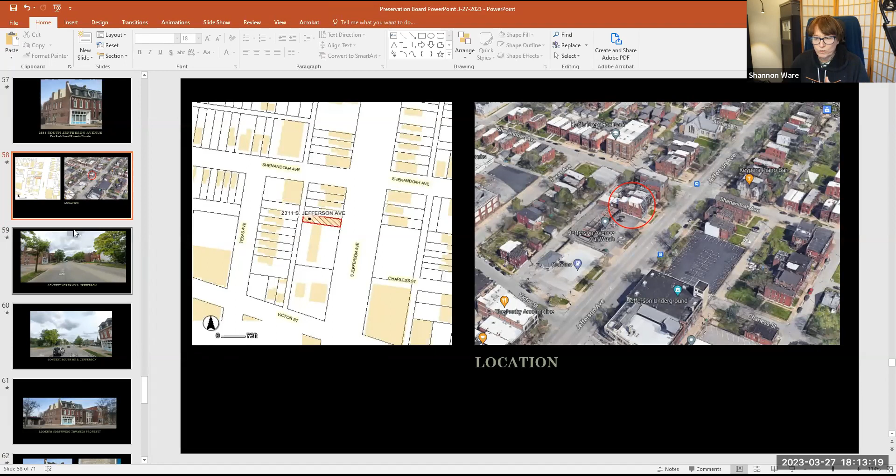We're not really proposing to paint the whole building. This is just a piece of art that is a very high profile project. Counterpublic actually approached us requesting to put this high profile installation on our building. It was not initiated by us, and there are many other things running from up at NGA all the way down to South Broadway. If you have more questions, Jesse can speak to the nature of the whole project.

As mentioned, I did do a lot of research because this building's very important. We're putting a huge, enormous amount of money into it, and I did not want to damage the brick. It's recently been tuck pointed on that side. We're proposing to use something called mineral paint, which is approved by the National Historic Preservation Standards and just about in architects and everybody, so it does not damage the brick. The Fox Park ordinance does mention that the reason for not painting is because of moisture damage to the brick, so we've addressed that problem.

So we would urge you, I think it is important to consider the context that this is part of a much larger high profile installation. We would request that you approve this project. We think it will enhance the neighborhood and be entirely appropriate. If you have any questions, I'd be happy to discuss them.

I'm not sure that I can phrase this in the form of a question, but I will tell you, this is not the first mural to come before us. Staff is not anti-art or anti-mural, they're dealing with the letter of a district standard that says you can't paint unpainted brick. So you're before us now. Okay, and we would consider it, if we approve it, as a variance.

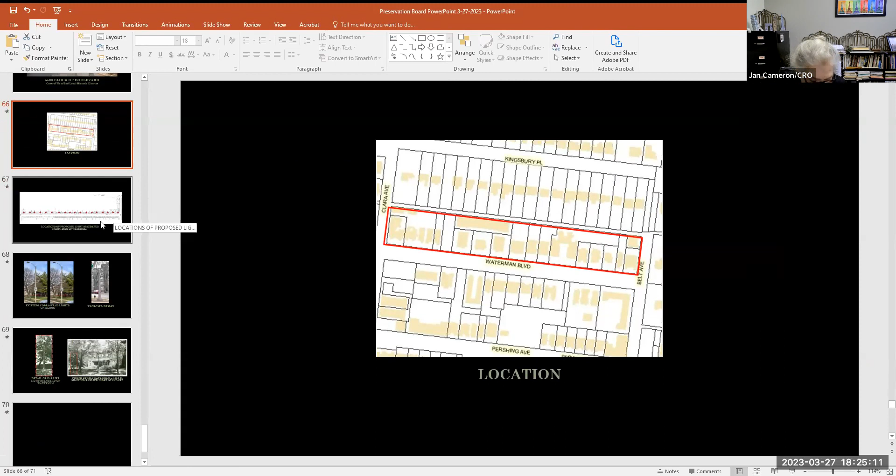This is the 5500 block of Waterman. The only lighting currently on the block are large Cobra head lights, and they are not being removed; they remain. The lights are being installed only on the northern side of the block between Clara and Belt, as indicated in red. This is the plan of the 18 lights, running from Clara to Belt, with additional work for conduit for electrical and other services.

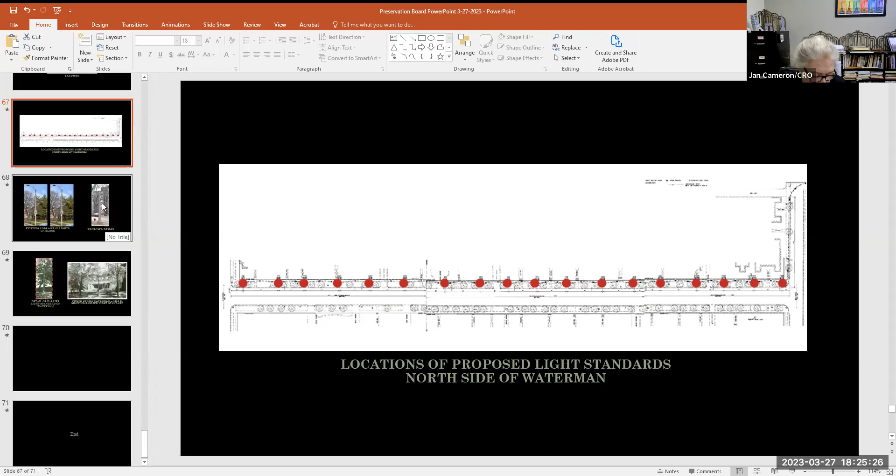Staff's preliminary findings are that the 5500 block of Waterman is located in the Central West End District, the standards are appropriate in material and design, complement the character of the block and neighborhood, and comply with the Central West End Historic District standards. The lights are nearly identical to those that existed on the block in the 1950s and 60s. Therefore staff recommends the Preservation Board instruct the director to recommend to BPS that the project be approved.